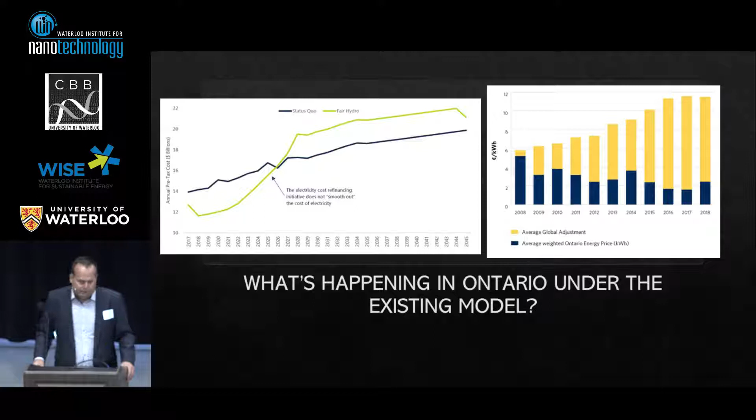Between those two solutions, you could pretty well mimic any other traditional generation system operated with a supply-demand mix. And then you have EVs coming on board, which means we could have a change in supply needs, meaning load shifting could occur across the province, where peaks today may be in the afternoon or evening, and we could see them shift to late evening or middle of the night, depending on how many EVs decide to charge and when.

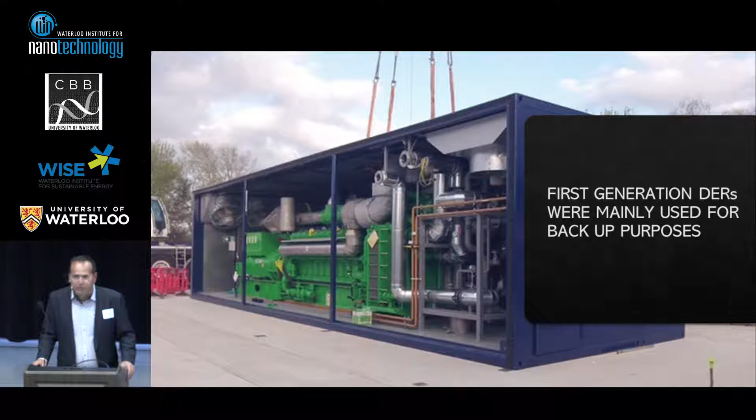I'll give you an example. If I want to make a decision on how to change my supply parameters to my customer, I have to go through about 2 or 3 different agencies to get that approval. You have to go for your normal board approval. In our case, I have to go for regulatory approval with the OEB process. And it could even lead us up to policy changes where we need the government involved. Every one of those agencies don't move that quick. They have a purpose and a validity in the market space, but we're not there to immediately react.

Now, innovation, that's a different story. Watch the auto industry right now. The largest player in the automotive industry today, with the highest growth rate, is not even an automotive manufacturer from 20 years ago. Tesla. 20 years ago, they weren't even a player in vehicle production. Now they're obviously number 1 in EVs. What we're seeing is every major automotive maker trying to catch up.

Why? Tesla moves fast. Others will move fast. You know what Tesla's biggest problem was? They never were used to making cars - production facilities, the mega factory. It wasn't their technology that was failing, it was their ability to produce. Who knows how to produce? The automotive companies. So there's the paradigm you have.

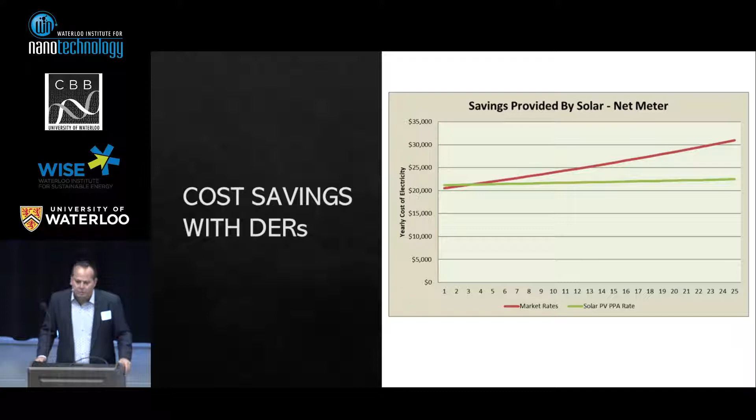Today, this is one of our installations on the commercial side that we've done. Net metering solution provided in Ontario. It's a market mechanism. And today, based on current market prices, some of these market prices actually dampen because of the Fair Hydro plan, meaning the end users are not actually seeing the true price and value of electricity. And we can provide an end user solution that saves them cost. Ours is the green line, the red is the market. So technology is already beating on price.

So while we have simply focused on 99.99%, that's not the pitch that we can use anymore with our customers. Reliability is still important. It's intelligence that we need to provide. Intelligence to the end user so they can make a better choice with us on how to use their end user asset. Yes, they maybe primarily want to use it for their needs, but what if I can offer them a benefit or a solution with the market such that we can benefit us as well and other customers? Maybe one neighbor has a cool technology and he's supporting the local grid.

So how are we going to use our technology and our intelligence to our advantage? There's 3 main areas that we're focused on. Some of these actually come out of the work that you guys do at a university. You're developing the latest technology. You're developing the latest way to use artificial intelligence. We're trying to take a combination of what the new grid needs to look like. It needs to be intelligent. It needs to be smart.

So now I don't just worry about the traditional supply of load and how much load it takes to deliver to a community. How much load do I need to be prepared for to deliver to Waterloo today? 10 megawatts of power. I need to know its load curve, along with a bunch of other customers maybe supplied at this university. We need to know more of that. What if this university decides to self-generate? What if they want to push power back on the grid? How would that change the way I want to operate? How can we create the benefits that we need between your technology and our technology?

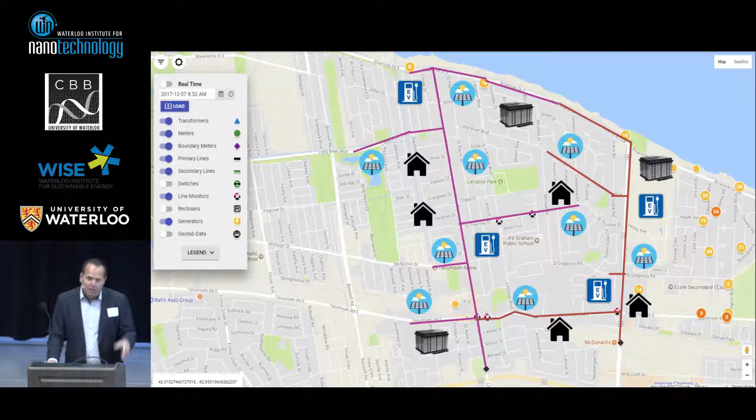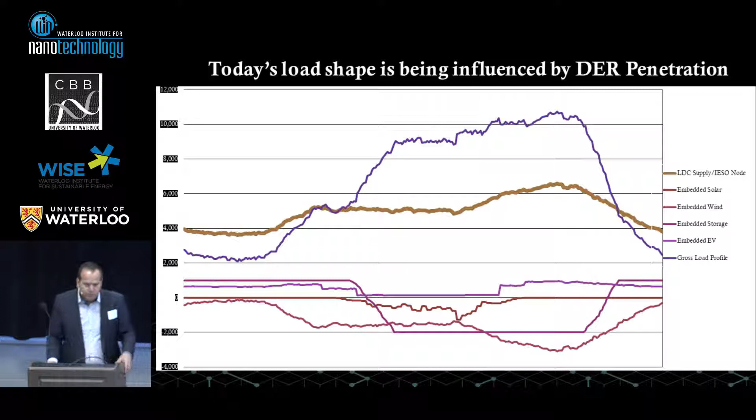That's the issue of the IESO, that's the issue as a local grid provider, is we can't build and design for all these different load curves. It'd be inefficient. Infrastructure is expensive to build. So we have to find a way using information to help direct what we want to do on that grid and where we want to use these resources and at what time. Then we have to influence the customer to move in those directions.

So we feel the intelligent grid that integrates with DERs is the win-win that Ontario needs. And it's like anything. I think Bell would be probably the best example. You don't see too many hardwired cables going to the home anymore, right? We're all about data or solutions, providing information flow back and forth. We were traditionally involved with simply delivery of load.

And it's going to take intelligence for us to be able to execute that same model of service to all the DERs that will exist in our grid. And it's in our best interest that we work together and we get on this train versus let the train pass us by.

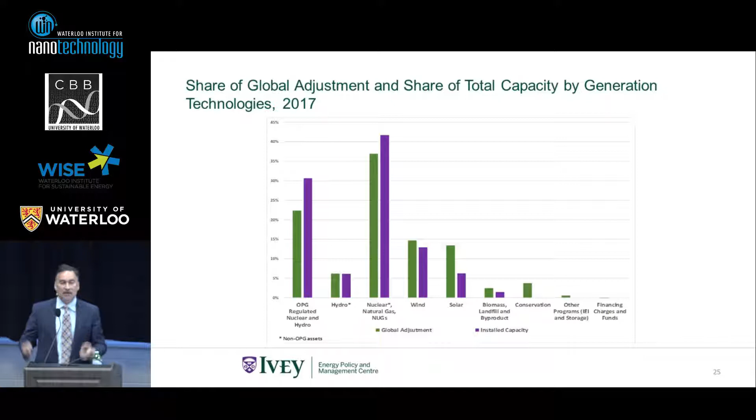But if you notice, their share of the global adjustment is greater than their contribution to capacity. And that's because wind and solar really isn't a capacity resource, i.e. they're not really there in those peak demand hours when we need energy. They're there, they kind of provide other types of benefits and services. Okay, let me move a little bit more.

So what's the issue? As I said, my concern is the way we recover the global adjustment today might actually hasten investment in distributed energy, and it might make it worse off for everybody. It might cost everybody in Ontario more than what needs to be paid, and there's equity issues involved here. So that's the issue I'm going to tackle.

A little bit of terminology and context. The hourly energy price, that green line that we showed you, the competitive market price, that's supposed to represent the marginal cost on the system. So the cost that would be avoided if we consume, say, one less megawatt of energy. Standard economic theory tells you that if you want an efficient market, prices should always reflect marginal cost.

The global adjustment, as I said, represents those fixed costs that generators need to recover if they were to build those assets, but they can't get from the market price, that marginal price. It's positive, as we saw. It's well above the market price. And what that means then is that we can't have marginal cost pricing, i.e. what is the efficient economic theory, and still pay those generators what they need. If we didn't pay them what they needed, they wouldn't be here and we'd have issues. So we still got to pay them.

What this does is it creates a new kind of pricing dilemma that we have, what's called the second best pricing dilemma, where we have to try and find a way to recover costs efficiently, but still make sure that the generators recover their costs. And this is what is kind of leading to the dilemma of how we're recovering the global adjustment.

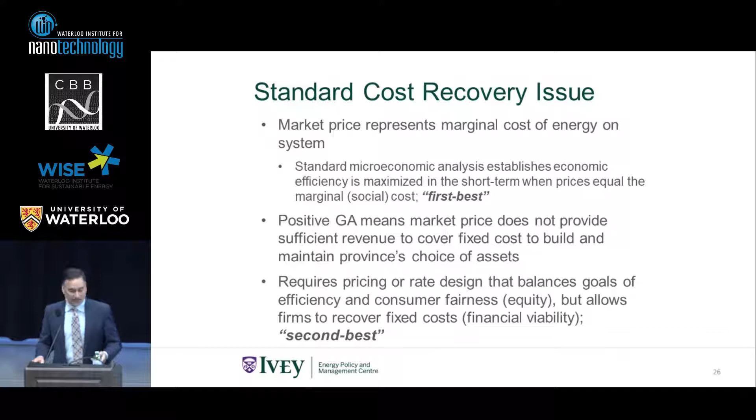What that often is looked at is to make sure generators recover all their costs, that price would reflect the average cost in the system, not the marginal cost, which means sometimes when the marginal cost in the peak hours is much higher to produce electricity than what the average cost is, we might actually induce too much consumption, and when the marginal price is really low relative to the average cost, we might be inducing too little consumption, so it might not be efficient.

Other charges are fixed charges. You charge a fixed payment just for access to the traditional grid, and that could recover fixed charges. And we have demand charges. Demand charges are charges that depend on how much you consume during certain hours, based on your kind of peak consumption, often during hours when the system's capacity constrained. And the concept here is we should charge people for how much they're contributing to that capacity constraint, because, well, that's how we're going to build new generation. So there's conceptually something there to that too.

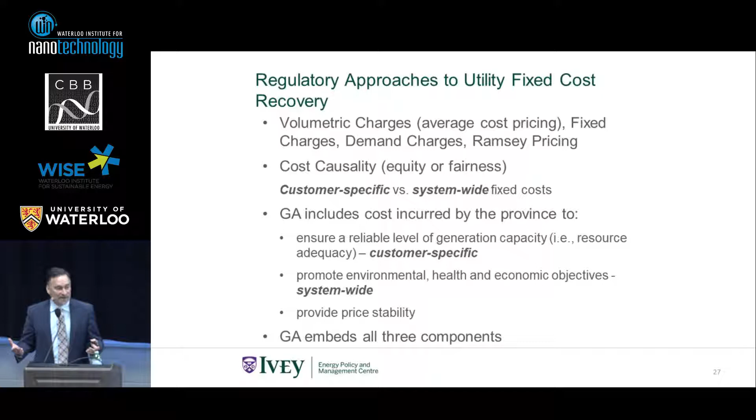How do I go back here?

So let me get to the nub of the problem. The way we're recovering the global adjustment today is on a demand charge. So for Class A customers, which are the large industrial customers, they are charged global adjustment based on their consumption during the 5 highest demand hours in a year. These are largely industrial customers. They're customers with peak demands on average greater than 1 megawatt.

So what that does is it says, hey, there's an incentive for me not to consume during those 5 peak hours of the year. And maybe that's good, because that's when we build new generation, that's when we need it to meet the peak demand, so maybe we can avoid future demand charges. The issue, though, is that the global adjustment embeds a whole bunch of different costs.

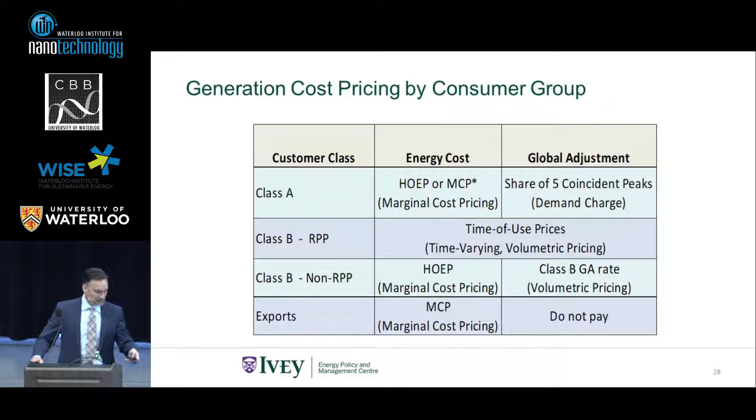Sorry, it's not moving now. Can't get it to move. Oh.

It won't go back. Anyways, the global adjustment includes a variety of different costs. We built generation over the last several years to achieve our reliability goals, make sure there's enough there to meet peak demand, but also our social goals, such as making sure that we could clean up the environment, replacing coal with things like renewable energy, as well as some job goals, such as creating green energy jobs.

Sorry, my thing's going off. Those issues are system-wide fixed costs, and they're not recoverable based on a peak demand charge. And so the problem with the way we're recovering the global adjustment right now is by including all of those costs, we actually over-incent people not to consume during the peak hours.

And the way they're going to deal with this now, as new distributed energy becomes more cost-effective, is they're going to hastily invest, perhaps, in technologies that are still more costly than the cost you'd avoid if you're actually using the traditional grid. And this isn't necessarily good because those costs, as I said, were sunk. And if they don't have to pay them, somebody else does, which is typically passed on to residential customers.

And again, what that does is it creates this cycle that, well, then they too are going to look for cheaper ways of meeting their electricity demand. And they too will start looking to aggregators, others who are using distributed energy technologies to get their electricity. And we'll be stuck with all these sunk costs. So this is the kind of dilemma that we have.

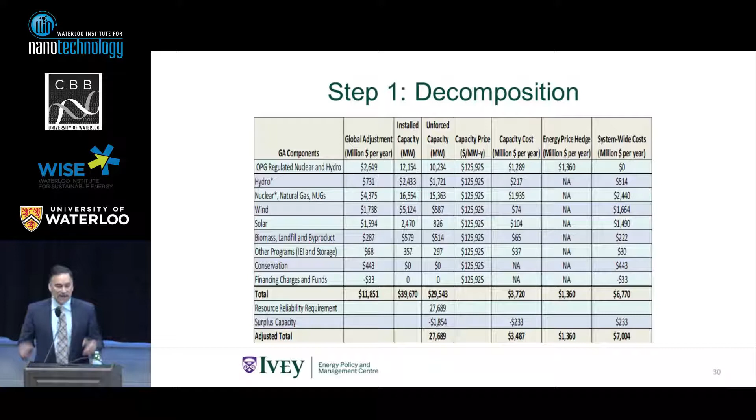In the paper, what I do is I actually plot out what those costs are. I can actually break out the cost of the capacity charges by using estimates of what the capacity costs are. And what I'm proposing is that it's okay to use a demand charge for recovery of the global adjustment, but you should only recover those costs that are truly customer specific and related to capacity charges. Other charges, we should find another way of recovering those costs.

That will reduce the potential for investing in distributed energy when it's not efficient, but also will create some equity issues. The issue being that the poorer consumers are those who probably spend more on electricity. And the more the costs are passed on to them, there's going to be this equity issue. And maybe we need to think about recovering those costs more based on ways that we think of distributing income in society in general. So in the paper, I proposed that perhaps, because these were incurred for social reasons, we should start considering recovering them based on some tax recovery.

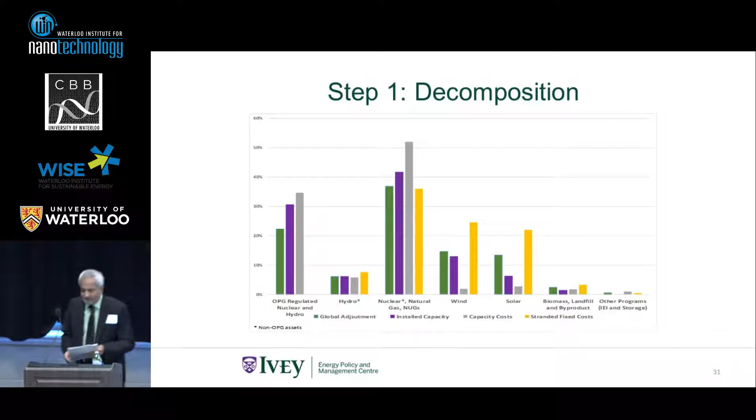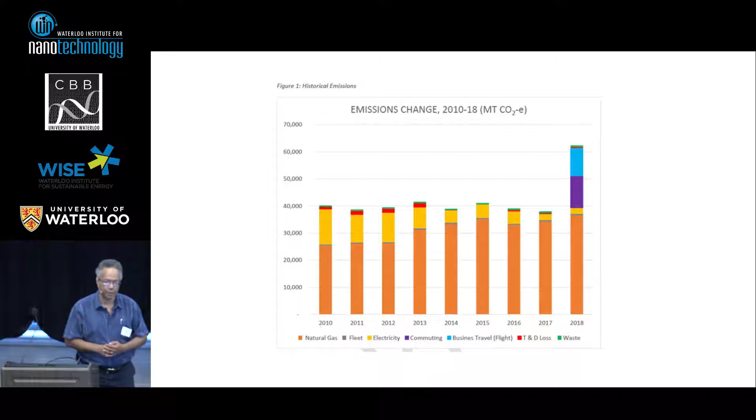Business travel, that's a little vague—we're not sure about those numbers. But the takeaway from this is that natural gas is by far the largest carbon producer that the university uses, and that is almost exclusively required for building heat.

We are Canada. It's a well-known fact that the planet uses more energy than the planet receives each year. The only real energy that we receive is from the sun, and the planet as a whole uses about one and three-quarters the amount of energy that the sun provides. In Canada, we use over five times the amount of energy—if everyone were to live like we do in Canada, the world would need to receive five times the amount of sunlight in order for us to survive and sustain ourselves.

So the whole point is we need to start reducing our energy intensity. That will help out with the redesign of the hydro systems, and with the redesign of the economic aspects of how we charge for receiving our electricity. Simply by using less, we make whatever forward-facing challenges we have a little bit easier to overcome.

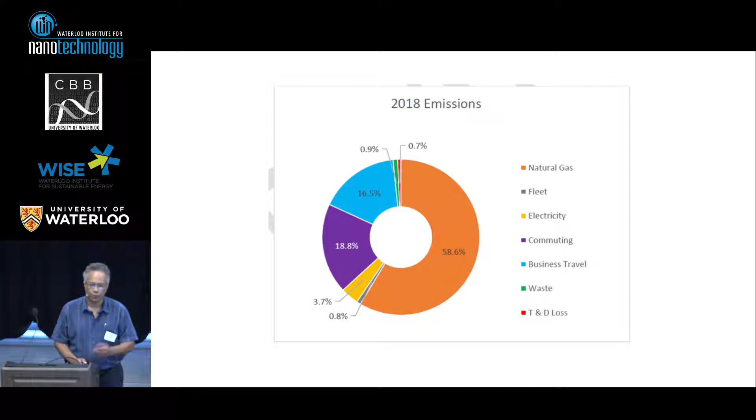So we would have to upscale our electricity needs dramatically in order to accommodate that. Yes, it's an opportunity, but it's a very harsh one to receive. So we're better off trying to reduce the amount of electricity that we need.

This is a business as usual emissions chart. What we hope to be able to do, and what we are currently planning on, is how to take that and make it a virtual zero by 2050. It's a tall order, but we're getting started.

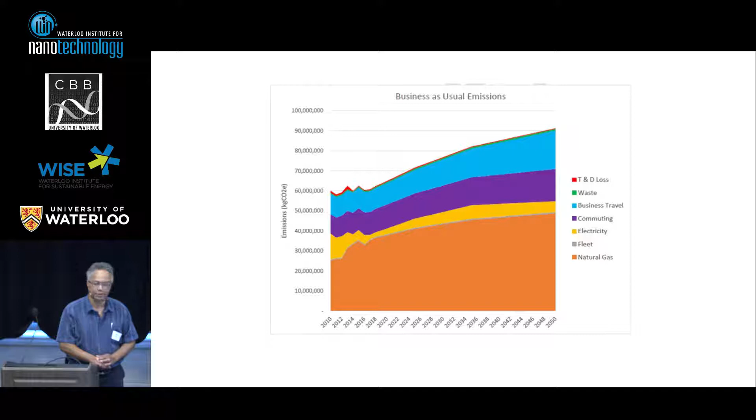And I'll just conclude, very short talk, in saying that electricity, alternative energy sources, innovation are all going to need to be combined, complete with the energy generation, the infrastructure that is there, the province, the nation, the world. We're all going to be tackling this together if we're going to learn how to continue to live into the next century. Thank you.

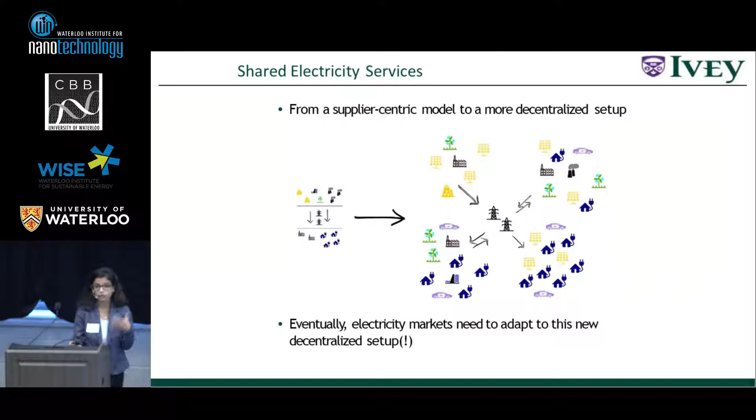As the first speaker mentioned, the technology is already there, the infrastructure is there, the data is being collected. How we can join this from an energy perspective is a key component, because otherwise we're going to miss the train. We need to adapt to this new decentralized setup, and we need to do that fast, because things are happening. So I will be focusing here on one particular paper that I worked on with Jatin, to try to see how data can support such a framework.

In the energy sector, you can share the energy storage, you can share the PVs, which are the solar panels, you can share different components. Here we'll be focusing just on sharing the energy storage. So instead of each single household owning their own storage, which is costly in terms of infrastructure, and also difficult to manage in a decentralized framework...

What we're suggesting, or trying to promote, is why shared energy storage doesn't come to effect. First, it's cheaper in terms of infrastructure. Second, you don't need as many storage devices in a given community as what is needed without sharing. Of course, you can also share distributed energy generation aspects like the PVs and other components, and this will all provide some demand flexibility.

So once you start sharing your data and working with it, we can set up energy management systems that can adjust things, and this will relieve the peak effect on the grid, as well as allow consumers to manage their prices and try to decrease their costs throughout the period we are considering.

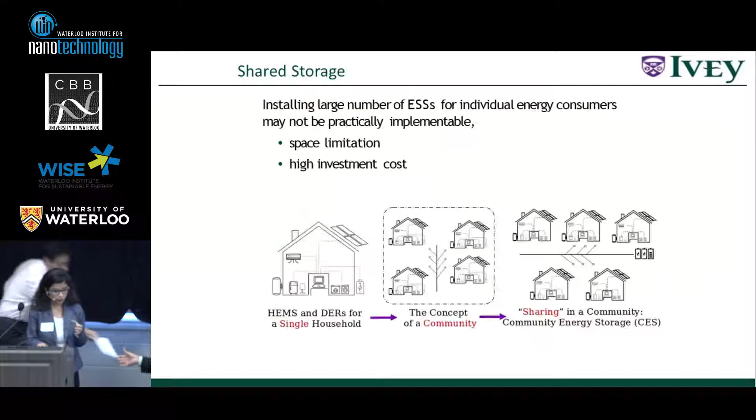So what we're trying to do is as follows: instead of going from a single private energy storage for a single household, we move to a concept of community. This has been going on really extensively in recent years. The technology is there, the mindset is there, so in the energy sector we need to mimic such an approach. We need to take advantage of this as well, by creating the concept of community, and figuring out how we can share with each other.

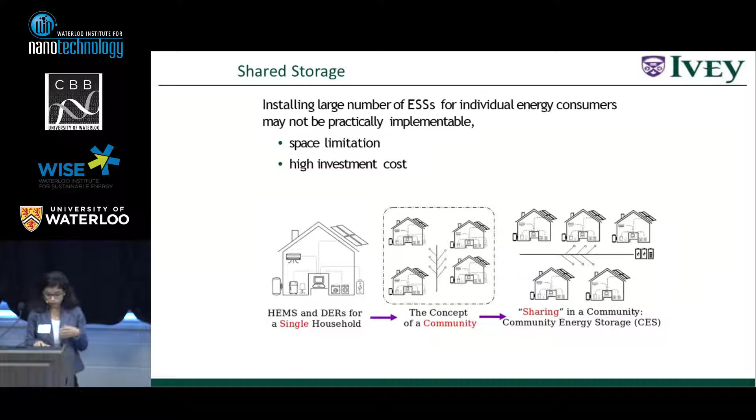Now we come up with this concept of community energy storage systems. So instead of single households having their private energy storage, we will be joining households together, and these households that are grouped together will be sharing their own energy storage. So how can we make the most of this setup?

We considered a general framework for this setup, starting with the strategic level. At the strategic level, you need to understand how many energy storage units you need for such a community, and also how to allocate these households to which energy storage. Does it make sense to allocate it randomly, or based on a certain criteria? So that's one thing at the strategic level: what sizes of energy storage do you need, and how many of them do you need?

These are all strategic points that we need to try to answer. Once we have our strategic setup, we can move to the operational component. Since households are now equipped with smart appliances and IoT devices collecting and sharing data, we can control household behavior at an operational level by scheduling certain items so that the collective cost of the community is reduced. We will think about two setups, the strategic level and the operational level, and how going from private energy storage to a shared community setup makes sense both cost-wise and efficiency-wise.

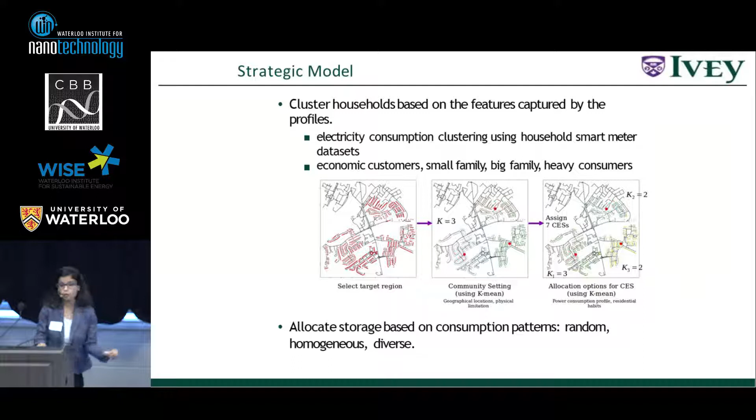But at least the option is out there. Okay? So that's the allocation part. So now, within a given setup, you can cluster consumers. You can decide on energy storage devices that you want to allocate these consumers, whether homogeneously or in a diversified way. That's something that can be taken a look at.

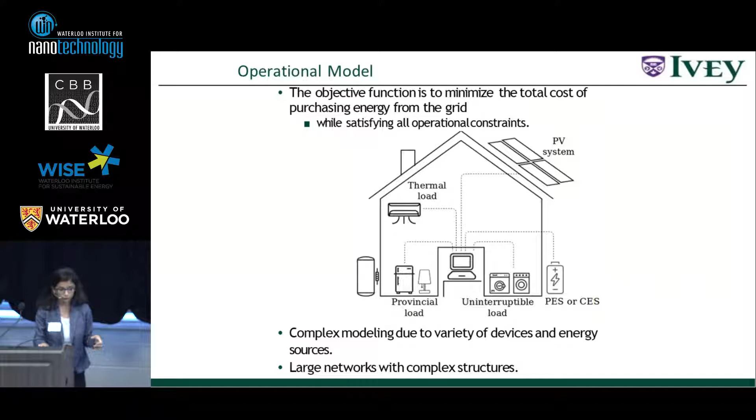Once you have this allocation, as I mentioned, now you have the operational component. So you have a household with a given PV system, with a given thermal load, with a given provincial load, uninterruptible devices, and so on. So you know exactly what their preferences are, and then you can schedule things accordingly. Okay? And that's an optimization type of model where you're taking all the operational aspects into effect, and trying to come up with the best cost for the whole community.

We tried a Waterloo use case in terms of applying this setup. So we applied this to a Waterloo use case where we took a region here in Waterloo, actually in the Laurelwood area, with around 1,000 plus households. We were able to cluster them and allocate these energy storage. We have some data from the IESO website, so we took into account how the PV system would react in winter days versus summer days. So we took also 2 setups, winter and summer. So these are the lines in blue and orange.

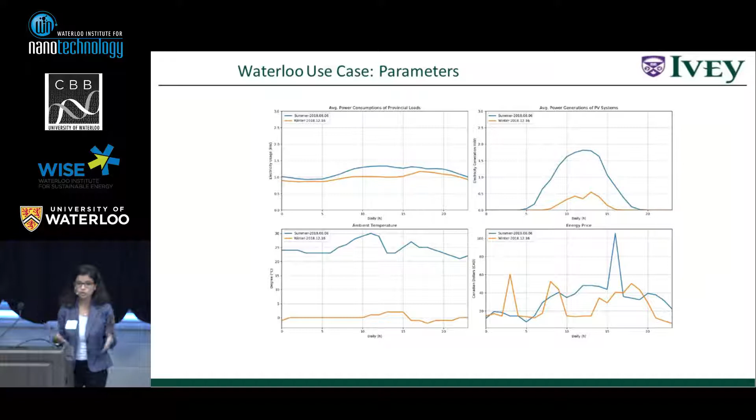So we have energy prices that vary throughout. We have the PV system, how much energy it can produce in summer days versus winter days. And we know the thermal load, how it changes throughout the time. So we have this input data that's coming from one side. On the other hand, once we simulate that we want to include these PV systems and storage devices in these households, then things really get reduced significantly in terms of costs.

And you can see here, this is the winter and the summer chart, and you can see a significant reduction in costs. Green is good, okay, especially in the summer. So the one in the summer is on the right side. So on the right side, if every single household has a PV system, as well as is connected to an energy storage, we can achieve around 46% in terms of cost saving for the whole community. And that's really impactful in the summer.

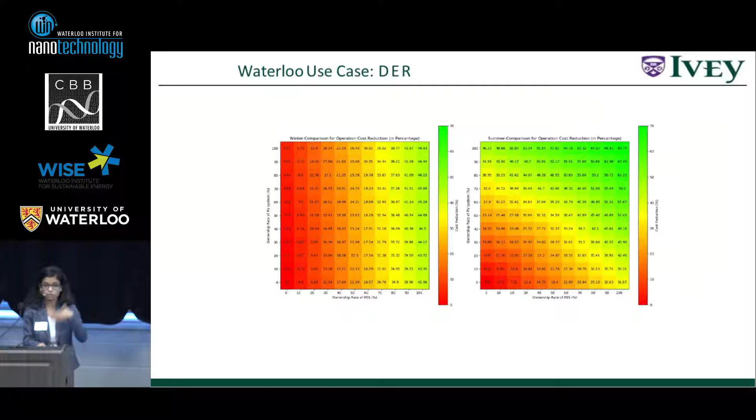In the winter, you can achieve a little bit less, but still you can achieve some reduction in terms of costs. So that's the first step. So going to a distributed energy resource system is really helpful. We reduce the cost of such a community. Now, if you go from a private energy storage to a shared community energy storage, that will also reduce the costs, not just the strategic costs, which are the cost of infrastructure, the cost of batteries, but also the operational cost. And you can see that in the figures here.

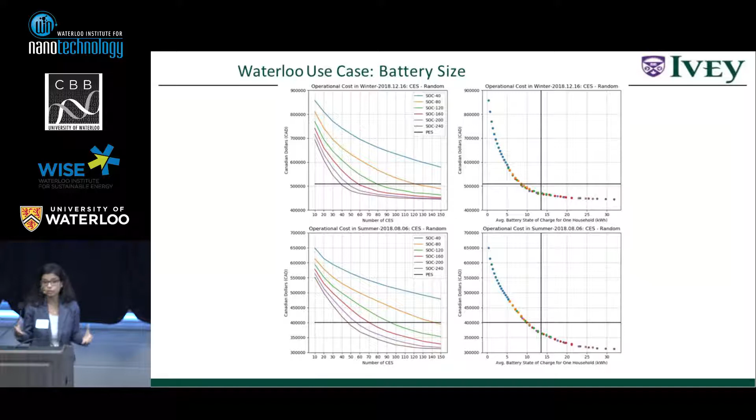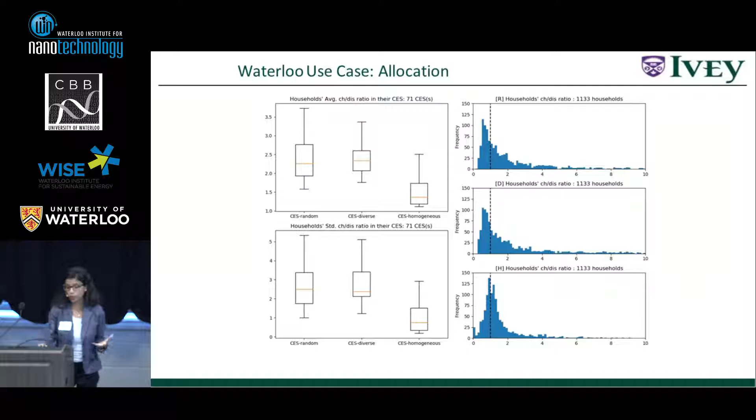And finally, I just want to touch upon this idea of fairness and utilization. So depending on how you allocate things to this battery, your operational costs, as I mentioned, are decreasing, but you also have to think about other KPIs that you need to take into effect. Fairness, utilization of the battery, which will reduce its costs along its life cycle. The fairness, how would customers perceive this? Of course, they would like to have a more fair setup, and all of these allocation options will provide you with such insights and analysis.

And with that, I think things are a bit shifted. I'm not sure why, but with that, I conclude.

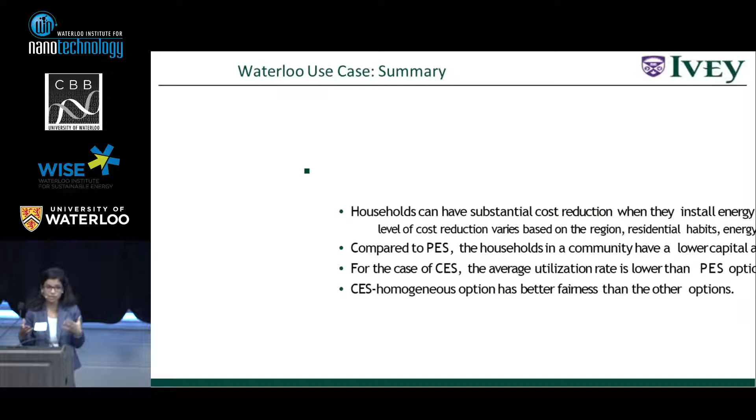So really, what I wanted to say from this talk is data is very important for moving forward. The second part is sharing resources is becoming a really clear, impactful thing, and data is one of the key enablers for that. So moving towards shared energy, either storage or PV system, for a community really makes sense, and you can see that also analytically with the numbers.